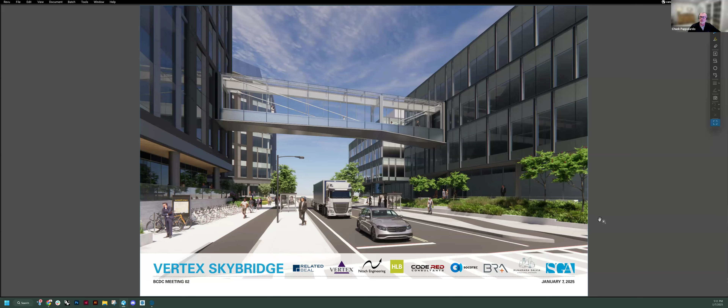A little bit about the basis, reasoning, and requirements for the bridge. The bridge itself is really necessary to facilitate ongoing manufacturing operations, as well as research activities at our East Seaport location, Leiden Center 1 and Leiden Center 2. Importantly, we are manufacturing our newest cell-based therapy program there. These are living cells that we manufacture in one building, and do QC testing in the second building. So the thoroughfare between the buildings is truly a requirement to facilitate this process in an efficient and timely manner, recognizing that this particular therapy has a 72-hour shelf life. So from the time it completes QC testing, we have to get it into the patient within 72 hours. That's really the basis around the impetus of the bridge between the buildings.

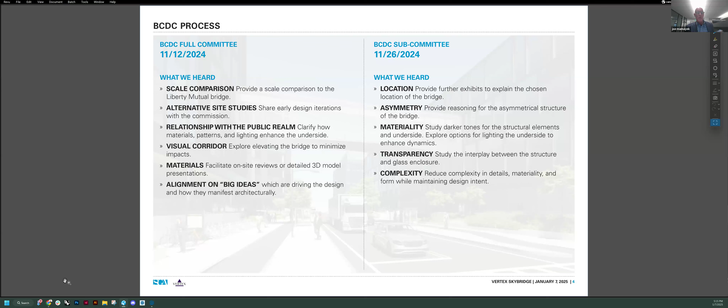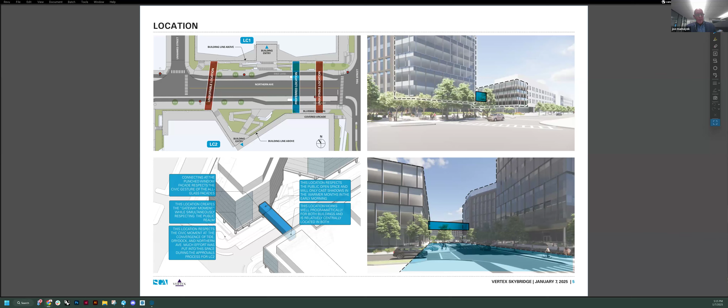In terms of materiality, we explored a number of materials, colors, hues, and textures for possibility with the application of the bridge. So we started with the light grays and silvers, looked at the darker grays and charcoals, and even moved into some of the bronze and copper patinas for consideration.

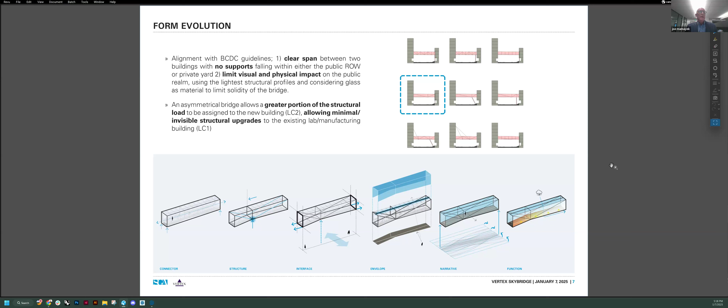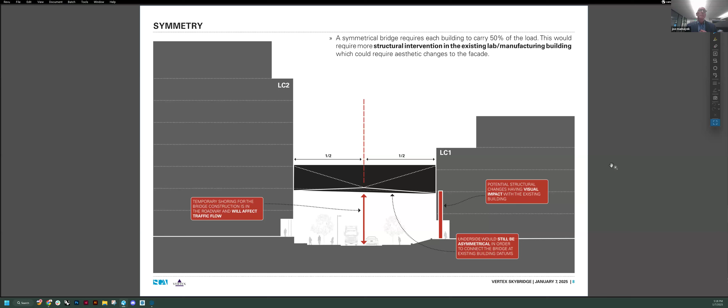Thank you. In terms of the symmetry of the bridge, we're looking at that point, 50% of the load would be applied to both buildings, and this would require some structural interventions of the existing lab manufacturing building, and certainly we wanted to minimize that impact.

Next one, please. In terms of going to the asymmetrical scheme, it allowed us to reflect the composition of the buildings themselves in the context that it is working in. So there's a balance to the overall composition with the asymmetrical scheme, and a greater portion of the structural load could be assigned to the new building, to LC2 on the left-hand side.

Last but not least, this asymmetrical bridge allowed for a reduced impact to the roadway during construction because it could be supported curbside.

An asymmetrical bridge design becomes more elegant, in my opinion, if the following things are taken into consideration. When the structural expression itself is not primary, it's secondary, or it's supporting the overall form. There's maximum transparency - the middle one is the most transparent. Our bridge itself has 3 sides of glass, so it's maximum transparency. And the last item, which is really critical, is that there's a balance to the overall composition to the buildings that they are attaching and the urban space that it's working in.

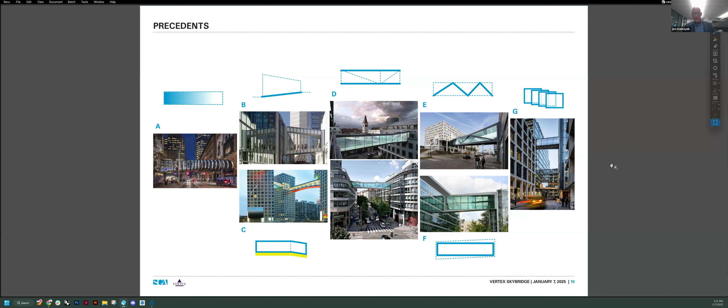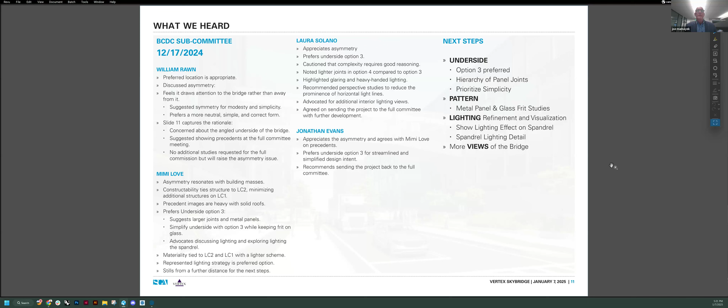Okay, so what we heard from the second subcommittee was to look at the underside, really simplify that, look at the patterning of the bridge, look at the lighting, and look at a few additional views of the bridge at different distances.

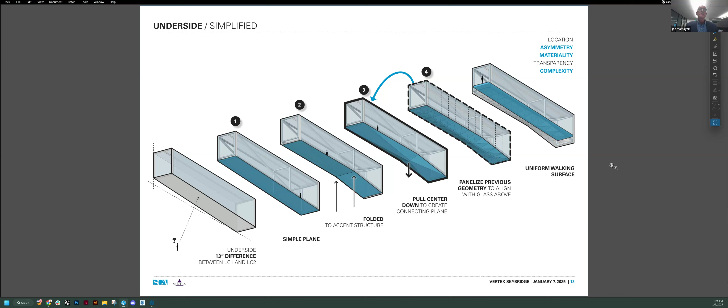This is an evolution of the bridge itself. We've essentially removed step 4 in this process and relaxed to step 3, which is a stronger statement, something we had in a previous scheme. Here's a diagram of that geometry and how it's really simplified. We're also looking at the hierarchy of panel joints—that was also part of the discussion.

When looking at the bridge, we're also considering its attachment and its reaction to the surfaces of the two buildings, looking at the horizontal and vertical datum points.

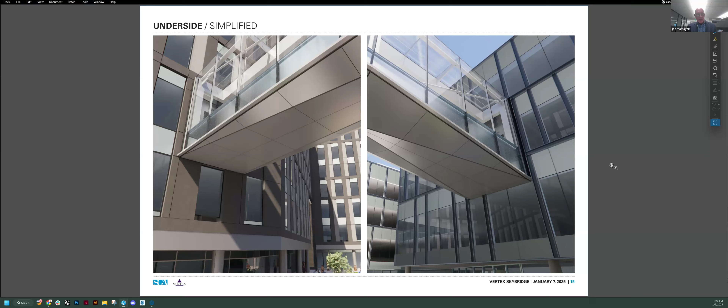Also from the patterning, working from the right to the left, the pattern is asymmetrical and densified. We've now removed the embossing on the underside of the bridge itself. We've relaxed the frit pattern to 1.5 to 2%, which helps the performance of the glazing but also makes it bird safe.

Looking at the lighting, this is something we're bringing forward with a little more clarity, looking at the light details and effects. Again, it's very sophisticated LED lighting. Here's an interior lighting scheme where there are no visible luminaires, either in the bridge itself or the public realm. You can see some of the technical lighting, positioned to give accents on the outside as well as the inside of the bridge.

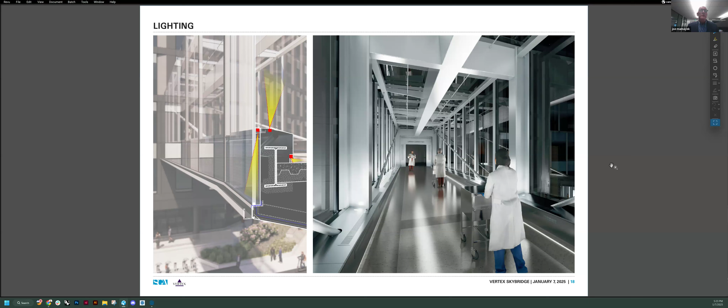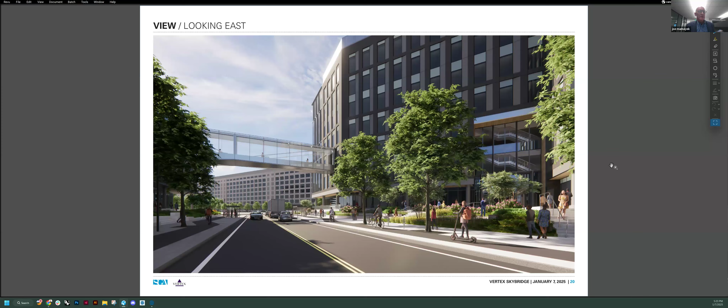Thank you. A few final views, coming a little closer to the bridge itself, a little closer to the site, looking at it from the public space right here, the main entry to the building. And lastly, the simple form-making, the selection of materials, the sophistication of the lighting scheme, and the balance of the overall composition will allow the bridge to become an elegant gateway within the Marine Industrial Park. So with that, I conclude my presentation, and thank you.

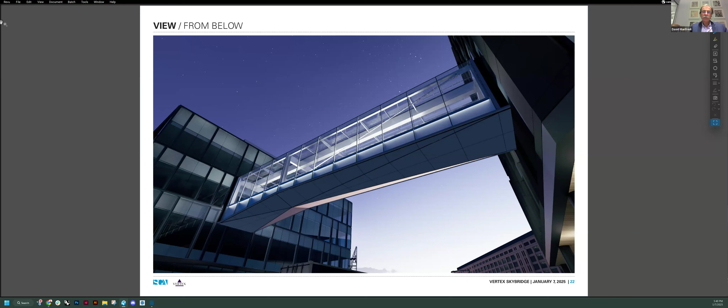And my second point is, I think Mimi made a great point. If there's one piece here, and I understand it structurally, that feels big, heavy, it is that big beam that runs between the two buildings. I'm sure there's not one bit of exaggeration in that section, but I agree with Mimi that I would ask you to really study how it's illuminated in order to diminish it and not celebrate it. The lightness of the envelope on the three sides is really very nice. I think lightness goes a long way to success in these bridges, and I wouldn't celebrate the heaviest piece of the composition.

Can you go to, let's take another viewpoint here, David. Thank you for your comments.

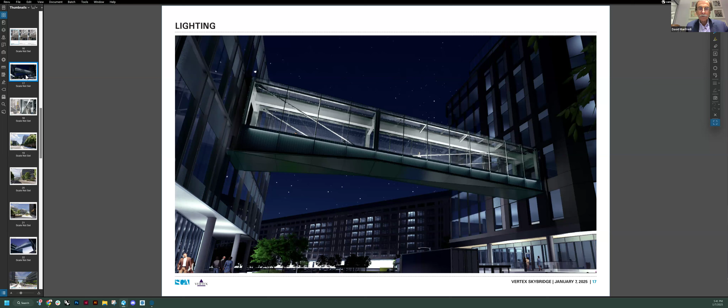I think what I'm hearing here is maybe de-emphasizing that center beam. That center beam obviously was there. We moved the structure from the corners, upper corners, to that center portion, which was a very good move, so we can celebrate the glass. But I think what we're hearing here, and I agree, is somehow reducing the amount of light onto that, and perhaps we get that desired effect. In the night sky, you almost want that beam to just disappear, and you see the very simple lines and the transparency. But overall, very elegant solution.

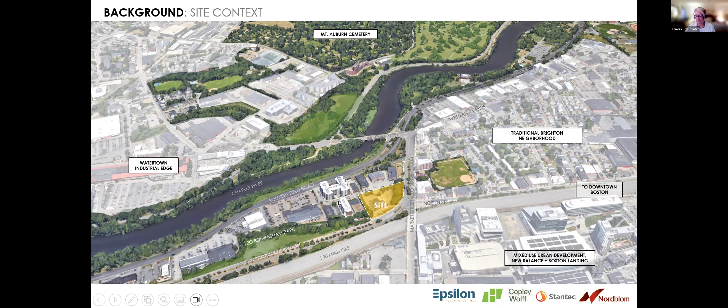Get this to advance, there we go. And as we've mentioned, it's just a fantastic threshold site at the corner of Market Street and Leo Birmingham, but it's also sort of in this ribbon of historic green space around the Charles River and in a new emerging neighborhood. It's very well connected, as this shows, both bikes and pedestrians and transit.

So our concept is into the woods, and we took a site with around a 24-foot average drop from one side to the other to take the opportunity to conceal our parking, develop a building in 3 wings where the open part of it faces directly south to take advantage of that for our amenity courtyard. We then are landscaping the front of it because the road is going on a diet, and we've clad it in warm wood and charcoal gray. And this is our final rendering.

What we heard both times from you all was really compliments on the architecture and landscape of the project, but specifically these points, which we then are bringing back to you today with some more revisions. One is bringing the green character to the boundary of the amenity courtyard. It was a simple fence, and it's been improved thanks to a lot of Laura's comments about trying to integrate that to the slope and the hills of the greenery at this corner. Adding more green space to the center of the cul-de-sac down on Soldiers Field Place, and making sure to refine the connection that we're looking at from the top to the bottom of the site. And then for architecture, improving what's seen from Soldiers Field Road. There's a pedestrian passage there we'll look at, and trying to celebrate both entrances a bit more.

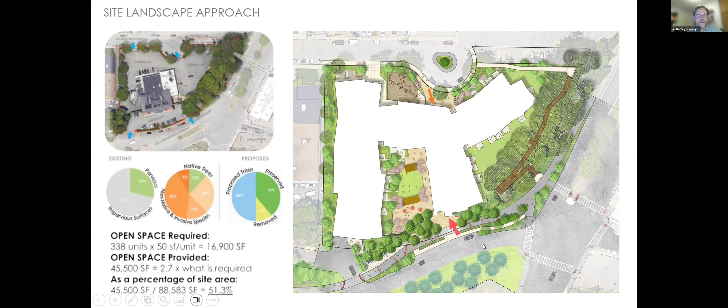This blows up the side of the project facing Boston Landing. The small blow-up on the left is what we had before, and the larger plan is where we are today. We increased the buffer from that southern-facing courtyard space with more landscape area, a sloped berm landform, and more vegetation, again trying to take the character of the existing grove to the left of the site and extend it across, so the building feels enshrouded in that greenery.

The small sections on the lower left show the before and after. The top one shows what we had before: just a fence, a hedge, and some lower level plantings. The section underneath shows the berming — we've introduced a wall to get more soil depth, really increasing the depth and height of the vegetation to make that a stronger edge.

Another thing shown here, which didn't come up in the BCDC but came through conversations with IAG and staff, is that the drop-off along Leo Birmingham Parkway has been extended from about 3 cars to about 5. We now have a stronger vegetated separation from the sidewalk at the drop-off from that multi-use path, to really limit the amount of crossings there — it's a safer condition.

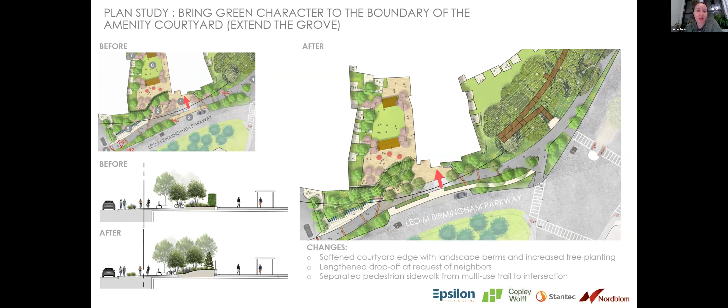Okay, great, thanks — we're also on the halfway slide.

This blows up the lower level Soldiers Field Place turnaround. One comment we heard was to do something with that expansive pavement in the turnaround, so we've introduced an island, a teardrop shape, planted in the middle, with cobble aprons around it to accommodate larger vehicles.

We've also diversified the experience of the dog area for residents, bisecting it into a smaller dog and bigger dog area, and introduced some topography there to make it more interesting. We've also started to look at the pedestrian connectivity from this cul-de-sac to the upper elevation, which will come up in the next slide.

This slide shows all the different configurations we tried for pedestrian connectivity from the lower elevation of Soldiers Field Place up to Leo Birmingham Parkway — about a 24-foot grade change, with all sorts of accessibility and access constraints to deal with. Through our process, we've heard that option 3, going right through the woods and that grove, is the preferred direction, and that's what we've expanded to show you.

This shows how we're planning to make that pedestrian connection from Soldiers Field Place up to Leo Birmingham Parkway. We're starting at about elevation 18 with a gently sloped pathway. Towards the bottom of that slope, we have a structured ramp on grade, giving us a landing point for an elevated boardwalk structure that flies through the slope, trying to miss as many trees as possible, and brings us up to an outlet closer to the intersection with Birmingham Parkway and Market Street.

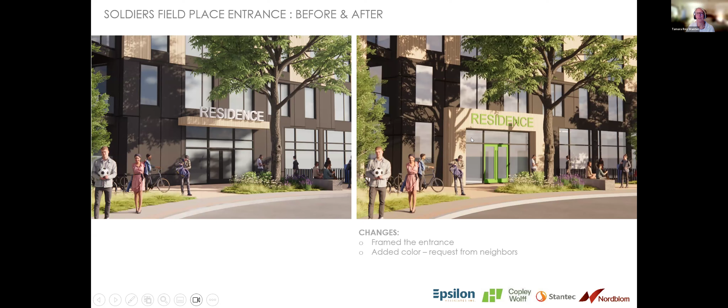This is our final slide, also at the front entrance. We've worked quite a bit on this in terms of improving the presence of the entry. We've extended out these pillars, extended out the canopy, created a little niche where people can wait for their Uber or other TNC, and added some color at the doorway.

As Ian mentioned, all of the landscape improvements around this central community plaza, we hope, will create a great gathering area along the multi-use trail for folks to have water filling and bike repair, and the blue bikes here as well. A great place to meet your neighbor and create a benefit for the whole neighborhood along this path. So that's it, thank you very much.

Thanks, Tamara. Thanks, Ian. Seth, before I turn it over to you, I'm anticipating a question from the commissioners: do you have a lighting diagram for the pathway that goes up?

We do not at this time, but we've been speaking with the boardwalk folks about how to integrate that into the boardwalk. We know that's going to be really important to have that safe, open, and well lit. I figured if you did, I would have you flash it up quickly for the commissioners.

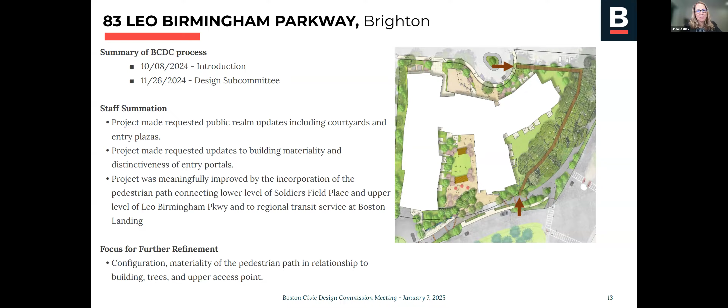Thanks, Seth. All right, Commissioners Evans, Love, Ron, and Solano, you have been at recent subcommittees, so we will let you take the first opportunity for comment.

Maybe the proponent can bring up their show, maybe one of the diagrams that shows us the open space and building in context.

You predicted our question, I see. Okay, thank you. All right, Mimi, I see your hand.

Yeah, I'm happy to start. I think this project has been a very strong project from the beginning since we saw it, and it's only gotten more refined and improved with the addition of that path. I think you were spot on, Linda, on asking about the lighting, because that's the one thing I was thinking about, as it's an incredibly useful path, not only for the residents of this building but for the neighborhood. But it needs to be safe, and lighting will be an important component.

So, I'm fully supportive, and I imagine that'll continue to develop as this talking to the boardwalk manufacturer, whoever you're talking to. I think that's an important piece.

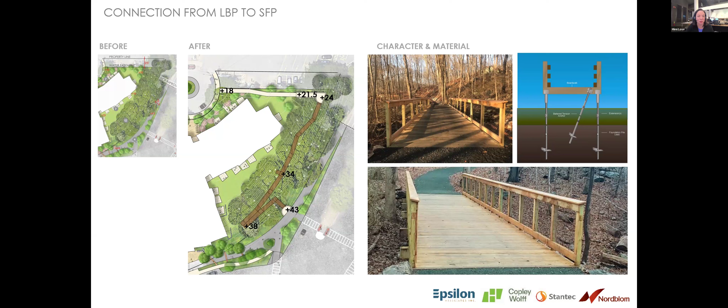I will say I still feel like the entrances aren't quite right. I can't even really recognize the changes from the last time we met, but I think that's an issue for the planning department to continue working on the entrances, and maybe they've now become too different from each other. But I do recognize that the entrance off of Leo Birmingham Parkway is the more important entry, and I like the scale and the moves and materiality. I'm still not exactly sure, but those are fairly minor comments.

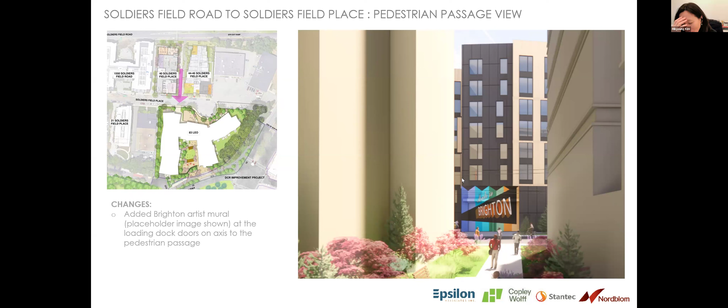I'm not going to repeat what everyone else says. Ditto. I wanted to just, I haven't actually seen this project before, so I think I just wanted to go back to Boston Planning and probably to this team.

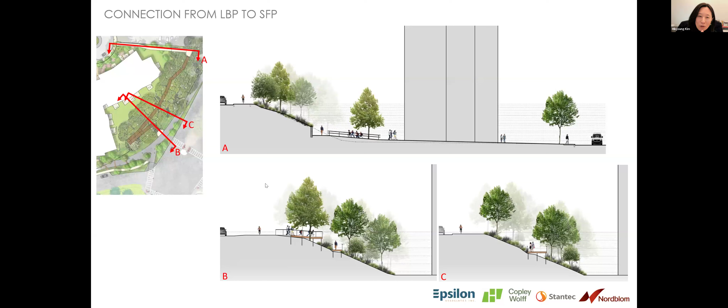There's a lot of interesting housing projects being developed, and just as a reminder to everybody, this is not this bucolic kind of neighborhood, but it is framed by the Mass Turnpike, by Soldiers Field Road, and Leo Birmingham Parkway, which is double laned and very busy. It is not pedestrian in any way. And this is the first project that I can remember that now jumps the road across Leo Birmingham. We've seen a bunch of residential projects on the other side of Leo Birmingham, and a lot of them are housing projects.

So I just leave this challenge with both the design team, because I think you've done an excellent job connecting things internally. But I think it would be good, as we look at future projects in this whole neighborhood, to ask the question: what makes a neighborhood? Now that we're making so much housing here and there are a lot of people living here, plus these big box retail stores, how can we make sure... all these projects are making very lovely, more internal green spaces and open spaces that are often more private. And then there's a playground across the street, if I'm remembering correctly, but crossing the street is a little perilous.

So I would just ask, as Seth and other folks go back and look at this project, to make sure that... I saw a planning document where there were these blocks of buildings, but it occurred to me as I saw this project that this is the one place in Boston where development teams have had the luxury to create really expansive open spaces, and to understand what the open space plan of this is. Because when I see each of these individual streetscapes, I think, oh, that's lovely. But then if I imagine it in its context, I have a harder time understanding how we're building a neighborhood here.

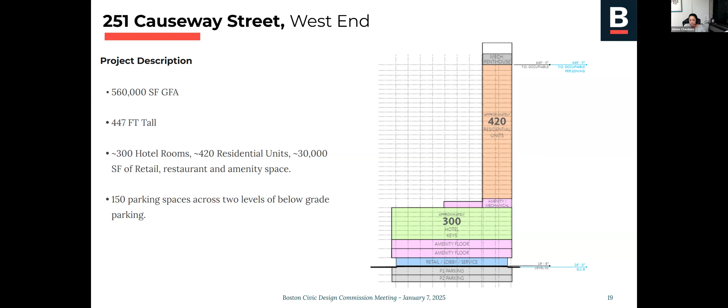The site is located in the Bulfinch Triangle plan, which was adopted in 1990. It was developed to restore the architectural integrity, traditional scale, and unique urban character of this neighborhood. New developments are encouraged through this plan to be contextual to the historic fabric of the neighborhood while enhancing its connectivity to surrounding areas.

Guidelines are given for design and dimensional requirements and are outlined in the plan itself. It's important to keep the goals of the plan in mind, noting that there have not been other development plans or zoning in the area since this time. Therefore, we understand its dated nature and the large amount of change that has occurred with respect to the surrounding context. We think a delicate balance must be made in taking both of those things into account.

It's also important to note that the site is located in the Coastal Flood Resilience Overlay District, or CFROD, which is designated for areas susceptible to high sea level rise. Due to this flooding danger, there are specific guidelines given by CFROD to ensure resilience in anything built. CFROD is a crucial overlay that this project must follow to provide the needed safety.

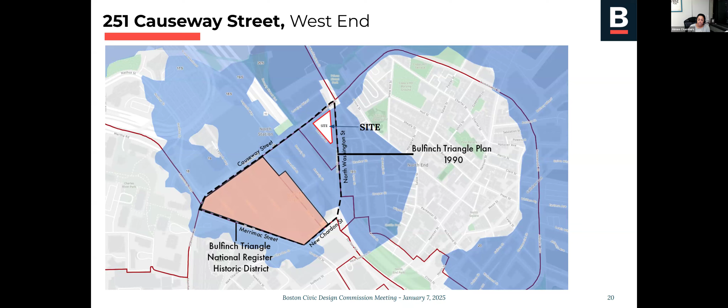A flash history: the district was conceived by Charles Bulfinch in 1808 and was a nexus of rail infrastructure, industrial, and commercial uses in its early years. Today, the historic district is made up of late 19th and early 20th century commercial structures that were once the center of the region's furniture trade. Over its history, the district has experienced constant evolution as a regional transportation hub with commercial uses and, more recently, entertainment, residential, and hospitality uses.

The Bulfinch Triangle today is bounded by Causeway Street, North Washington Street, New Chardon Street, and Merrimac Street. The site is located in the northeast corner of the district at the intersection of North Washington and Causeway, and flanks Medford Street. The triangle is surrounded by the North End to the right, the West End to the left, the edge of Government Center, and the North Station Boston Garden Hub on Causeway complex. The old elevated central artery and Green Line used to bisect the neighborhood just east of Canal Street.

The formalized Bulfinch Triangle Historic District lies to the west of this area at a predominant height of approximately 80 feet. The Central Artery Tunnel project put these large infrastructural elements below grade and replaced them with a new fabric of between 110 and 160 feet in height, between 2007 and 2018. The surrounding areas across Causeway Street then saw significant redevelopment in the following years.

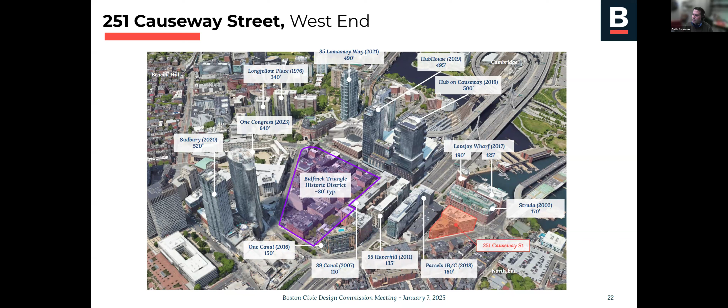With the TD Garden, Lovejoy Wharf, and the Hub on Causeway, and more recently, the Government Center garage is being transformed into a multi-block mixed-use complex. The fabric of the North End across Washington Street remains relatively unchanged, with smaller scale reinvestment over the last few decades.

Article 46 of the zoning regulations sets the max height at 100 feet and max FAR at 7, provided that the project is subject to large project review. It should be noted that the zoning requires a step back from Causeway Street: starting at a height of 65 feet, the building must step back at least 25 feet. The proposed project is located in the CFROD with a sea level rise base flood height of 19.5 feet, which will have implications for the uses under that base floodplain and the design strategies for flood safety.

While there are no parking requirements for the Bulfinch Triangle District, this project will be subject to Boston Transportation Department's large project parking maximum of 285 spaces. The North Station Mobility Action Plan has planned numerous improvements to bus, pedestrian, and cycling circulation in the area, and particular attention should be paid to the design of the pickup and drop-off areas, as well as parking and service entrances.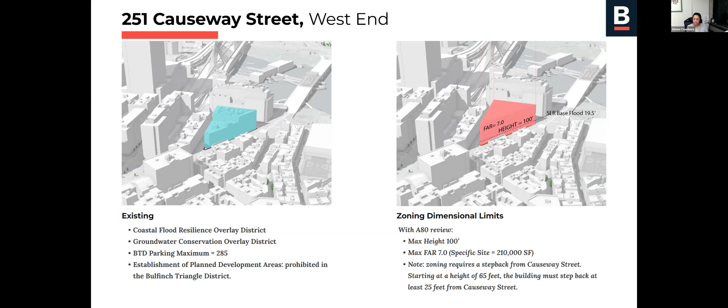Section 46-8.1 is taken directly from the zoning code. These provisions are derived from the 1990 Bulfinch Triangle District Plan. These are some of the specific guidelines and highlights given for new developments to the neighborhood. So commissioners, as you take in the project itself, we would encourage bearing in mind the design considerations here on the screen. And that concludes my presentation.

Commissioners, I think having the proponents come earlier has been a request of our commission, so we're excited to get some initial feedback from this commission early on.

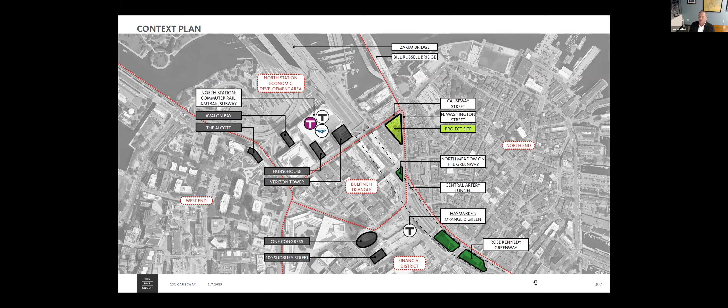With that, I'll kick it over to David to go through the design. Hi, I'm David Epstein, design principal at Gensler.

I'm going to take you through conceptual massing, looking at how the program could fit in the city, which is the major thing we've been thinking about. This is the stacking diagram you saw a minute ago, a mid-rise 150-foot high building that would hold the 300-room hotel, with the 420-unit apartment building placed on top and pushed to the north of the site, keeping it quite slender.

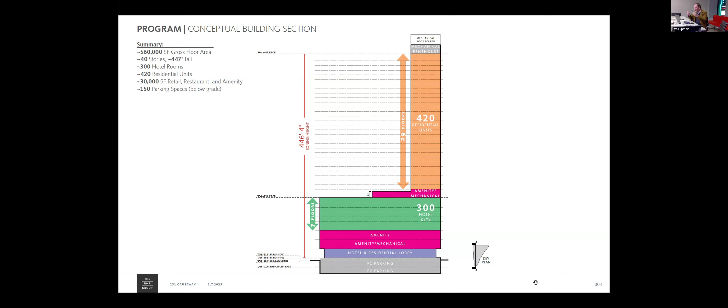To show you conceptually what our design logic is: the hotel, at 150-foot height, is at the same orientation as the rest of the triangle, trying to push that as a nice, beautifully scaled building. Then we place the tower, pushing it to the north, away from the triangle and the North End, keeping the east and west sides slender to reduce the amount of shadows cast on the North End.

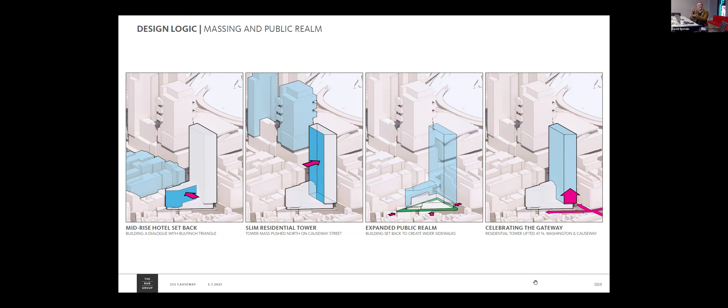The next important thing about this project is changing the public realm that's there today, lifting the building up and pushing the massing inward to make the sidewalks much larger than they are today. There's also the resilience aspect just spoken about, lifting the building up to create a bit of a porch around the building, pulling it out of the ground plane, and celebrating this gateway site by lifting the entire residential tower above the corner of North Washington and Causeway.

This sets up what that frame is like, pushing our building, in the bottom right-hand corner, to the edge of the gateway, sitting on Causeway, with the mass holding the smaller scale hotel building at the same orientation as the buildings of the triangle, creating a flatiron building out of that.

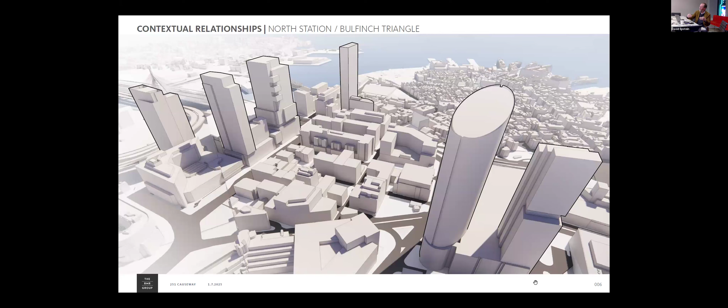When you look at this photo from above, from the west end, looking towards the building, placing it almost at the edge corner of the site as you arrive on the Bill Russell Bridge to the city, and having it be one of the taller buildings on the Causeway, as part of that dialogue of those towers. The most important piece is very much about the ground plane and how it's going to change what's there today so significantly.

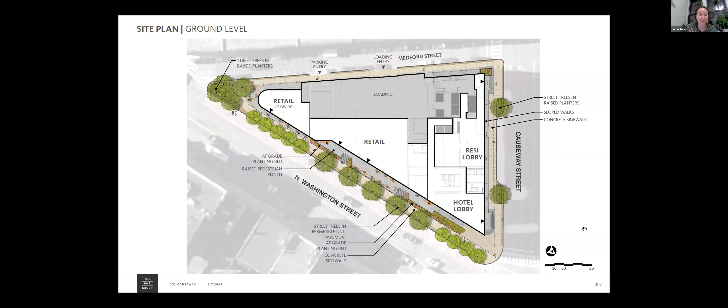Now, a little bit about the preliminary massing, taking this diagram and applying the skin just for scale more than anything. We know we're going to build a resilient, sustainable passive house project. But this shows, most importantly, a slender tower pushed to the north side, a smaller flat iron building to the south side, connecting with the scale of the Bulfinch Triangle, the tower now being part of the towers on Causeway.

As you approach on North Washington and Causeway, lifting the tower up creates this higher open space, lifting it to the sky and creating the gateway, getting what Kaki just spoke about, this kind of lifted ground plane with trees on the street side, a terrace on the third floor that's part of the amenities, and a roof terrace on 11. So you get this greening of the street, a triangle space created of a deck space and a roof space.

And then as you see it from North Washington, moving northway on the road, this flat iron building lifted off the ground plane creates a larger sidewalk by pushing the building in, and then this small pocket park at the nose of the site creates a kind of buffer zone and a bit of a safety zone, because the street's quite busy with buses and cars on North Washington, trying to make that a much nicer experience than it is today.

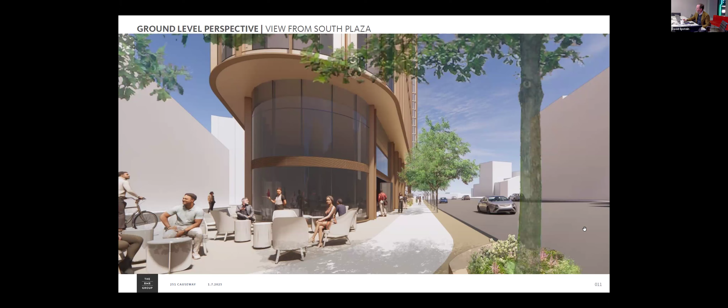And then looking lastly at the massing from above, the hotel building at that 150-foot height creates this flat iron building on the corner, and then the tower pushed to the north, framing that zone and creating these outdoor terraces, and a simple building in the skyline that creates this frame around this entire section of the city.

And with that, what we want to do more than anything is show you guys how to take a program, sit it on the site, fit it into the city at a conceptual level, at a massing level, and really just get input early on in the project.

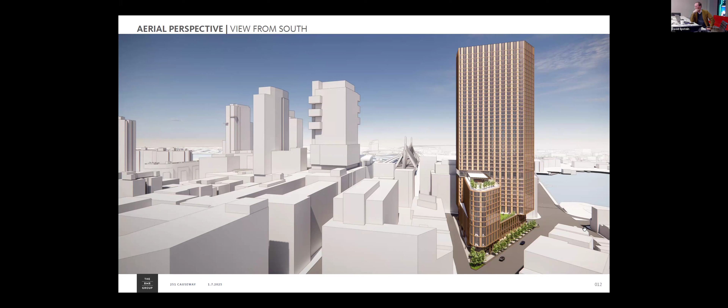Thank you, David and Kaki. Commissioners, raise your hand, but I'm going to start with Kirk Sykes. Actually, Mimi, if you don't mind, we have some urban design progress to share. Lizzie, if you could share. Yeah, I thought that was woven in before.

Apologies. So prior to the presentation we give context, and post-presentation we start to talk through the conversations and issues we've been having with the proponent and the particular challenges the site produces. This site is really emblematic of the challenge in a dense urban environment of the relationship between and competition between public realm, transportation, historic preservation, and good urban development and design.

The existing fabric, as you can see on the right, is marked by a very limited public realm with very challenging slopes, and also speaks to the contested space of streets and sidewalks, which often limit new opportunities for open space. As we work on this project we're asking how much of the existing urban fabric should be saved, and what are the opportunities for new public realm in all preservation scenarios.

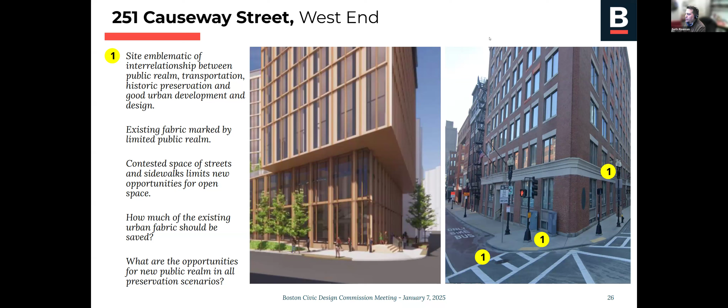Next slide, please. The proposed project creates additional public realm at the sidewalk level by undercutting the upper levels. And because of the need to change the grade for CFROD, there is a lot of tricky navigation of grades to get from the lower level to the upper level that Kaki took us through.

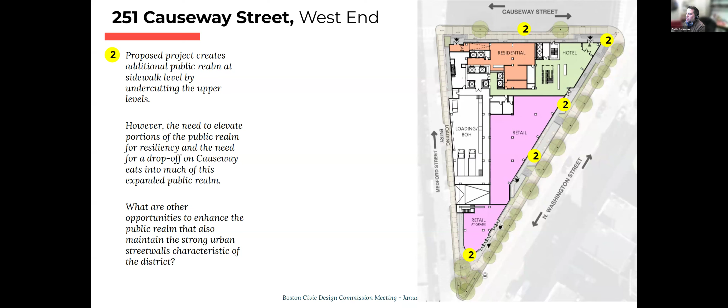Additionally, there's a drop-off proposed on Causeway Street that begins to eat into some of this expanded public realm. We are asking very much what are the other opportunities to enhance the public realm that also maintain the strong urban street wall characteristic of the district. Next slide, please.

As the proponent mentioned, they are early on in the design process and will be conducting a series of additional studies as part of their DPIR filing. We very much think these studies are needed to evaluate the relationship of the building to the context and the impact on the public realm, including urban form, historic resources, environmental factors such as wind and shadow, and of course open space.

Specific studies we'll be requesting include the tower orientation, the tower and podium orientation, where setbacks may make sense, step backs as well, and providing a clear logic for the tower massing and height within its immediate context and context stretching across the adjoining neighborhoods.

We're requesting them to look at alternative schemes that maintain the corner 251 Causeway Street building and/or other buildings on the site to see the pros and cons. We're looking for additional views that back up from various vantage points within Bulfinch Triangle and across North Washington Street from the North End. And of course, as part of any DPIR, but really important here, we'll want to understand wind and thermal comfort analyses. With that, I'll turn it back to the commissioners.

Thank you. Thanks, Seth. I see a lot of hands raised, which is great. Looking forward to the comments. If we could just keep them tight and not repeat, that would be helpful in trying to keep our time, which I'm already not hopeful that we're going to stick to on our agenda. But with that, Kirk Sykes.

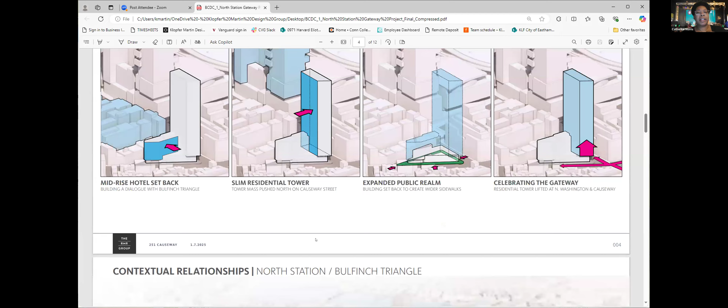The ground plane is probably more of a major concern for me because Medford Street on a busy day, if there's a Celtics game, something at the city winery, something else happening, people zoom through that street. And it's a heavy concern about the traffic on that side and it being a loading dock and people also trying to figure out ways of parking. So I'm concerned about that side of Medford Street as people are using it as a pass through to get to Causeway.

And then from Causeway, when you're turning onto Washington Street, I'm not sure what that's going to do for transportation in terms of how buses zoom there, and the safety of pedestrians, particularly on that corner, because it is a very short sidewalk. It does raise concern for me around the safety and experience of people at that ground plane, given the current design being proposed tonight, that I just want you all to consider.

And that corner of Medford and Washington, which is essentially round, where the hotel lobby is at Causeway and Washington, you may want to consider rounding those edges, just because it's so stark from something that's much more welcoming on the other side versus where the hotel lobby is. Just something to consider when you're thinking about people's experiences engaging with this building and design.

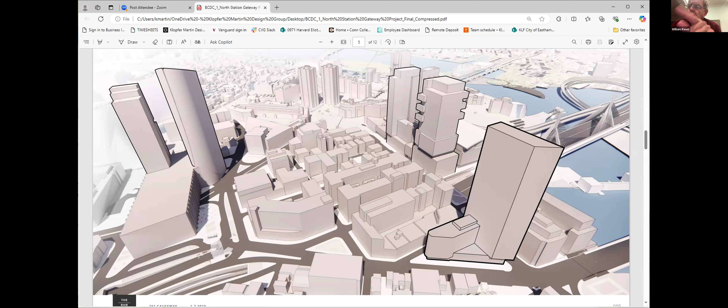Are you able to give us the view of this building in a developed rendering? It's been part of your presentation—yeah, this one. Okay, so when I first saw this view, I said this is quite extraordinary, the way this tower comes down to the ground and joins with a low-lying building, and then the hotel at the head of the site. Of course, what I didn't realize was that this tower overlaps the sidewalk in a serious way.

And so all of a sudden, a building which felt crisp and very clean in its connection to its lower piece suddenly overlaps both Causeway and Washington Street in such a strong way that you lose what could be an incredibly beautiful composition. So if I were in the petitioner's shoes, I'd be trying to get to that, to make the whole composition a much crisper thing.

A second point: recognizing the low-rise portion, the retail—listening to Khaki talk, it's clear that Khaki wishes there were a little more green on the site, I suspect, and certainly the public would too. And it's easier to take away the two stories of the low-rise piece than other pieces of this building. So I ask that be considered.

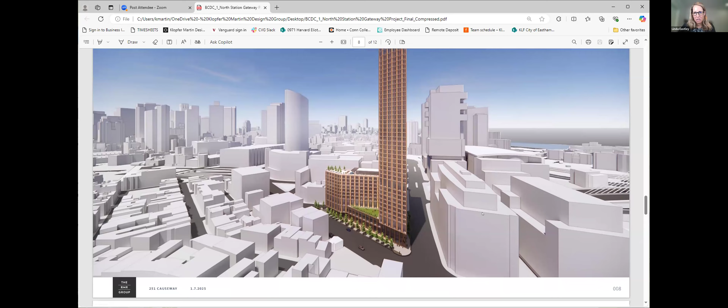So we see it here at this really important corner. Again, the idea that the public realm is expressed as a product of this underbelly of the tower - it just feels like it could be a little bit more, and it feels like that building is larger than the site maybe should be allowing. If we move to slide 11, it shows another example of how we're essentially undercutting in order to get that public realm. Could there be opportunities where that building hits the ground in a different way while still creating a generous public realm expression?

The other piece that hasn't really been talked about today - and this is early days, of course - if we can go to slide 12, and scroll up just a little bit, I wanted to talk about the top. As you're exploring this with us and with the planning department, I'd really love to understand your thoughts about the top. For me right now, because you haven't had a chance to look at that design, I think the top becomes so important. Part of the reason is that you're going to be seeing it from a really long view, coming across the bridge in two directions. I think to make that landmark statement, there needs to be something really special that happens there.

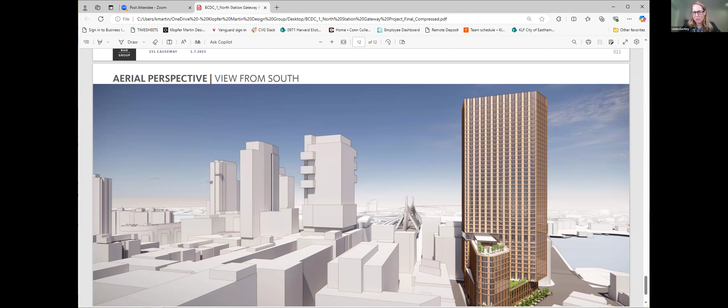And last, I wanted to talk a little bit about the pocket park - we don't need a slide to talk about it. I think this is a really terrific idea. It is an incredibly busy corner. As you, Kaki and others begin to explore that, I'd be curious to understand how you might integrate some sound mitigation tools into that site to really make it a respite and a haven on that corner. I think in its own right it becomes a gateway at a different scale when you're coming from the other direction toward the Bulfinch Triangle. I think actually having that low presence with the hotel and this kind of green presence could be as wonderful as having a really strong architectural edge on the other side of the site.

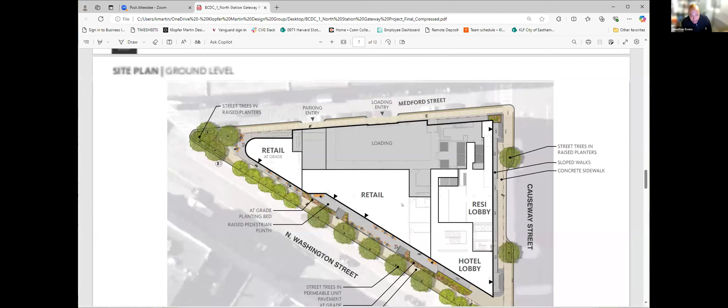Thank you. Again, it's really helpful to see this early and elevate some red flags, which I think we're seeing. I agree with a lot of what's been said, specifically with what Bill and Linda have offered. Can you go to the slide that showed the massing generation diagrams? I think these are helpful. As we go into future subcommittee meetings, similar to what Kathy just said, I think understanding what else has been considered to get to this. What are some of the rules for why the tower is oriented that way, and sort of not perhaps in a north-south direction?

Just basically understanding what the bigger organizing idea is. I kind of get some of the impetus to fit in with the fabric, with the mid-rise and then stepping up. But again, I'd love to understand a little bit more, see some more about what else has been considered in how to put these pieces together, just to better understand, maybe to David's points, fit and contextuality and appropriateness, but also a clearer understanding from your end about what your design goal is, or what the objective is, what you're trying to accomplish here, beyond just the idea of a gateway, which can mean a lot of different things. So I'll leave it there without repeating what else has been said, but it's exciting to see this and I look forward to more conversations in subcommittee.

Thanks, Jonathan. David Manfredi.

Yeah, very briefly, there's an awful lot to think about and talk about here. First of all, I do really appreciate your coming in early and showing your, I guess not first, but early thoughts. And obviously you have put a good deal of thought into this. It's a gateway, I guess, to the city. It's also in the middle in so many ways. It's wrapped on one side, on almost half of the circumference, by Lovejoy Wharf and the North End and Bulfinch, and relevant to all the things that David talked about.

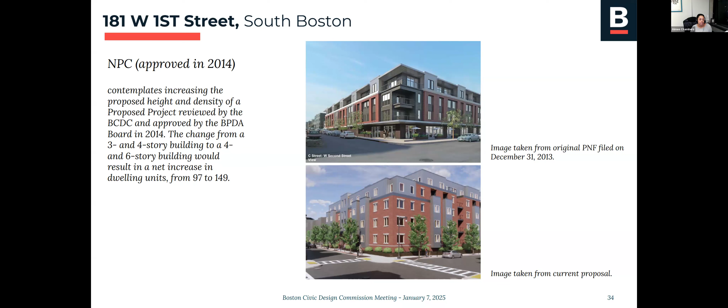The proposed multifamily residential use is permitted within the MFR, the multifamily residential zoning subdistrict. The 2011 Planning and Rezoning Initiative for West 1st Street, codified in Article 68, envisioned a residential context to the west of the corridor and a more industrial fabric to the east, closer to the waterfront. When the zoning was adopted, it was presumed that properties along the Reserved Channel would continue to be characterized by industrial and surface parking uses in the long term.

Subsequent years have seen an evolution of these uses in the neighborhood, including the addition of residential uses in the immediate adjacent area. The South Boston Transportation Action Plan, an ongoing project hopefully soon to be wrapped up, will evaluate safety concerns in South Boston and focus the city's resources on proven strategies and people-first improvements to eliminate serious and fatal traffic crashes.

The goal of SBTAP, as it is called, is to build upon the vision and goals set forth in Imagine Boston 2030 and highlighted further in Go Boston 2030. Through improvements to the surrounding streetscape and abutting sidewalks, this project will help to reinforce the goals outlined by said plan.

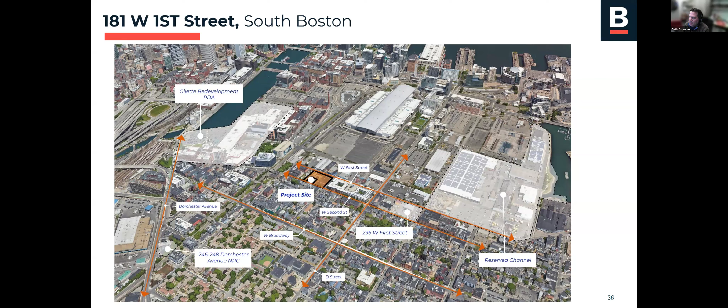While the proposed project exceeds zoning dimensional maximums, planning and urban design staff worked to refine building massing that is contextually consistent with the ongoing evolution of West 2nd and West 1st Streets. These changes include a 6-story setback that came out of discussion with the community, which helps bring the project closer to the scale already present in the area. Staff review also focused on improvements to the surrounding public realm, including new widened sidewalks, upgraded street intersections for enhanced pedestrian safety, and the protection and addition of street trees to create a robust canopy around the site perimeter.

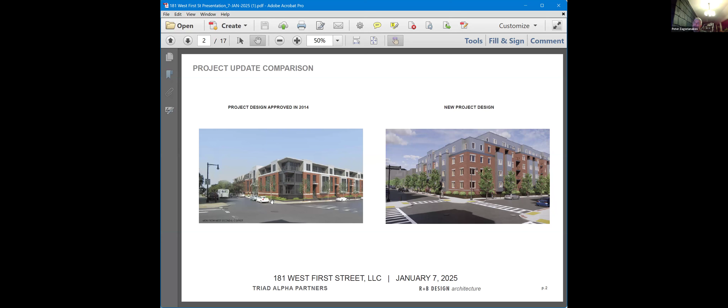In order to implement affordable units and more infrastructure improvements, we've decided to come back for a taller project. We were 3 stories on 2nd Street; we are now 4 stories on 2nd Street, and we are 6 stories on 1st Street, where we were 4 stories on 1st Street. We have increased the FAR from 2.0 to 3.1. The unit count increased from 97 to 148. The affordable units went up from none to 20 units.

This project is passive house certifiable. We're doing a project of 127 units at the corner of 8th Street and 1st and 2nd, down 5 blocks down the street, which is passive house certified right now.

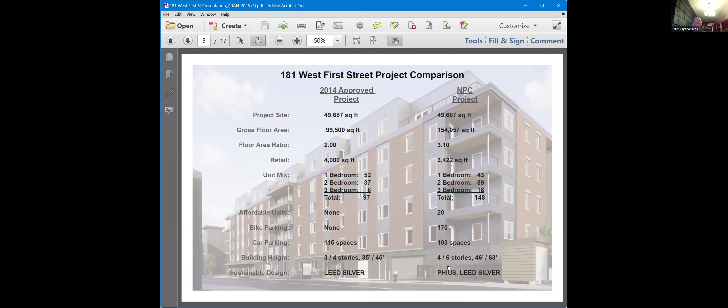As the BPDA mentioned, this is a transition zone. Across from us on 2nd Street are mostly 3- and 4-story residential buildings. Then you have the West Square building, a 4.5-story building built approximately 10 years ago, which takes up the entire block. The Signal building is on the same side of the street as we are; I own that building and did that about 15 years ago. And then we have two commercial projects permitted right along C Street behind us as you approach the convention center—one's a biotech building and one's a hotel. Both of those buildings are proposed to be 75 feet.

We also have Mahoney Park, which is a very important element of the neighborhood right next to us. We've considered the different elements and stakeholders in the area, meeting with the neighbors multiple times and the BPDA multiple times, and this is what the project has evolved into. We think we've got a very nice project here.

The first change we made is that the single corridor element of the building was set back 59 feet from 2nd Street. Originally that was right up to the street. We did that to create a pocket park, which helps us create more air and window lines to the three-story structure in the middle of our U-shaped site, and allows us to integrate with the park.

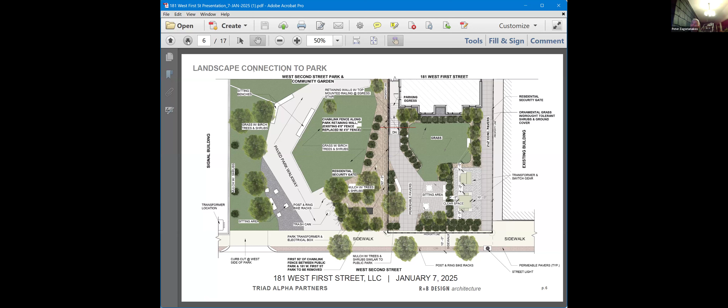A couple of pictures of the park itself. This is the fence that's being removed. This happens to be where the transformers in the park are, but all of this grading will actually grade nicely between the two properties.

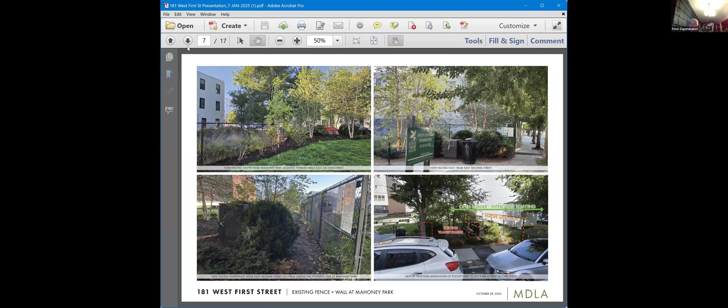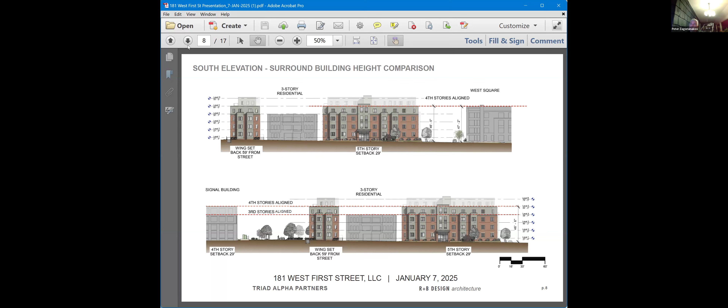Along C Street, we have the cornice line across from us, which is a 4-story residential building. We're slightly higher on our 4 stories, then transitioning up. Our 5th story is set back 29 feet to limit visibility from 2nd Street, transitioning up to a proposed building on Commercial Street, which is 75 feet. We're at approximately 63.5 feet high.

Along the park side, on our 5th or 6th story, depending on which elevation you're looking at, we've set this back 10 feet to eliminate that story from shading the plants in the park. And if this is our First Street elevation, I am going to turn it over to my architect, Ron Bennett, at this time.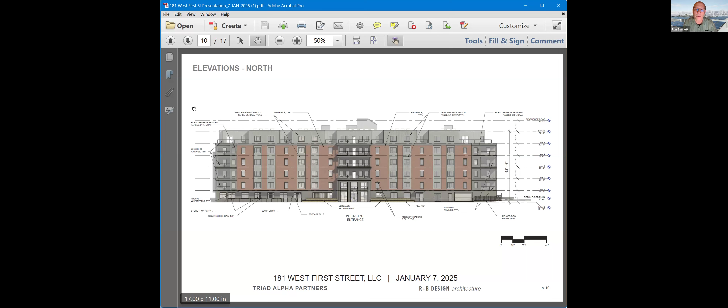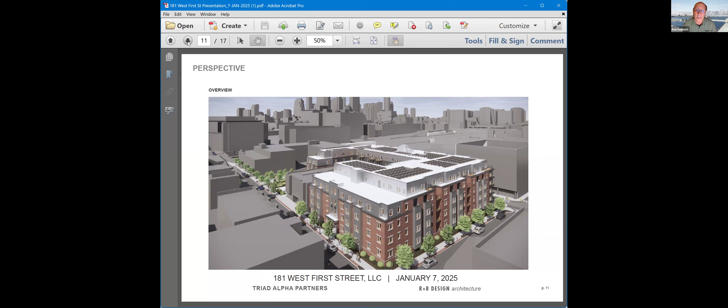We are presenting a simpler facade on West 2nd Street compared to what was approved in 2014. We eliminated the corner balconies, and in fact all balconies facing West 2nd Street, in response to our neighbors' concerns about balconies and roof decks facing that direction. This new design has fewer overhangs with a simpler penthouse level for a lighter profile against the sky. Because we'll pursue passive house certification, we've reduced the glass ratio to about 13% of the facade area with European style tilt-turn windows.

Fairly traditional materials palette specified for long-term durability and minimal maintenance: red brick, metal panels in two shades of gray, and touches of cement panels here and there surrounding the balconies.

We've articulated the facade with pairs of vertical bays around all sides of the building, and balconies in the corners, and roof setbacks on all sides except West 2nd Street.

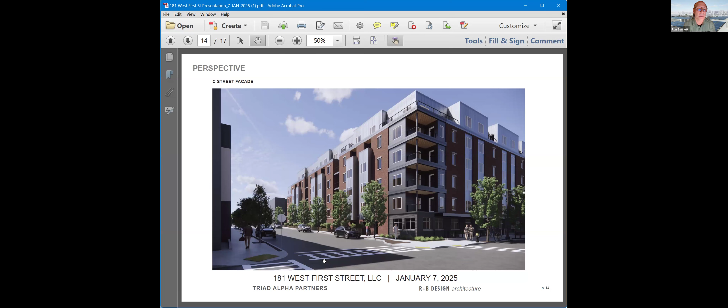You'll see them here. This is the corner balconies facing the corner of C and First. We also have balconies above our bays on C Street, and also on the roof setbacks in front of the penthouse.

On the west side of the building, we pushed the building back 59 feet from the street to create a park. We've also set back the penthouse level to reduce shading on the park next door. There are trees already growing in the park that will provide a nice screen between the park and the lower portions of our building.

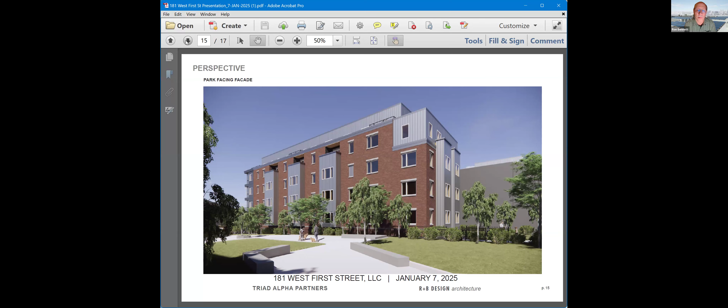I think we're done. Thank you, everybody.

Seth, are we going to get follow-up comments? Yes, Lizzie, you could share the screen.

We've been working with the proponent and focusing very much on the public realm, and are very much in support of the creation of publicly accessible on-site open space. With the increased height and density over the original scheme, we'd like to see if there's a possibility of creating even more open space.

The design and programming relationship of the new open space to the existing open space should be enhanced. The proponent talked about some of the challenges inherent in that, including grades, planting, and transformers, but we want to continue to explore enhancing that relationship with them. We also need to better understand the relationship between the tenant amenity space in the courtyard and the adjacent parcel.

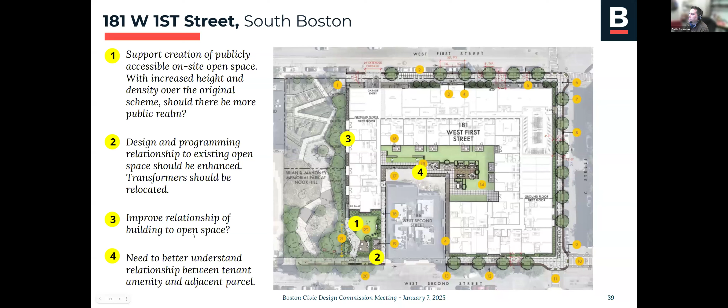We very much appreciate the intent to break down the scale of the building both horizontally and vertically, as well as aligning step backs and key datums to the height of existing context, particularly the setback on the upper level facing West 1st Street.

However, we think we need greater clarity on the massing logic of the overall composition, with a clear hierarchy of primary, secondary, and tertiary massing elements, and aligning articulation strategies with the massing strategies. Also focus very much on how the building meets the ground on each of the different frontages and unique sidewalks. With that, we'll turn it to the commissioners.

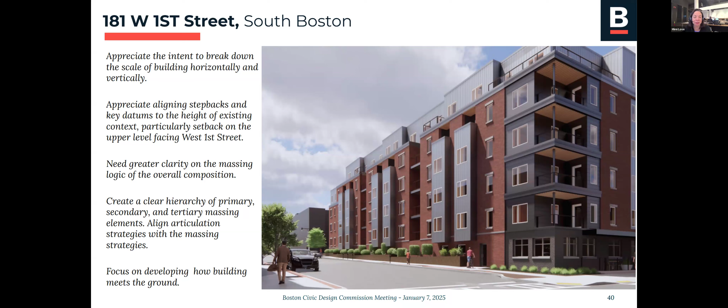Thank you, Seth. Commissioners, comments? Maybe we can have the proponent team pull up the presentation. Maybe we start with the site plan, and then we'll pass it on to David Hassin.

Okay, I'm happy to kick it off. I think the proponents are correct, and planning is correct, in identifying this area as a transitional area that could take more height and massing than the previous proposal did.

In that respect, I think the larger program, the introduction of affordable housing and so forth, is all very positive. The pulling back of the massing of the single-loaded U to create more space does provide a more gracious entrance to Mahoney Park, and some of the things that Peter mentioned make a lot of sense as well.

I do think it helps certainly with the snuggle that the building basically creates around the existing three-story residential.

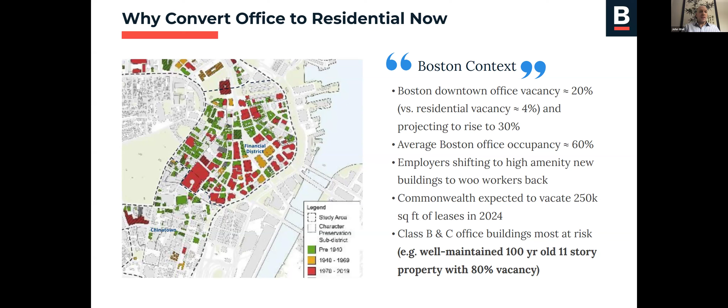Mayor Wu's office residential conversion program, from our perspective, really is something that is a tool that can be used, and really a proof of concept that office to residential conversion can happen in Boston.

It really, from my perspective, is a win-win because it's responding to the changing streetscape and work environment post-pandemic. We're looking to create much needed housing downtown, and at this point across all of Boston. And we're also looking to bring more vibrancy to the urban core.

Finally, one thing a lot of people don't really touch on is that, in truth, the greenest building is one that already exists. When you look at the total embodied carbon, and the fact that we can reuse existing structures rather than razing them and putting new structures in their place, it has a great impact in terms of sustainability.

Really the program is, as you'd expect, taking these older, underutilized office buildings that in many cases are dark buildings, and creating new multifamily residential rental units, bringing vibrancy and light back into neighborhoods.

At its heart, as I mentioned, it's a tax abatement. So it's a 75% tax abatement being offered for 29 years. And that is the level that HR&A identified and thought would be the most meaningful for what the city of Boston can do.

Similarly, what we've also paired with this is a streamlined Article 80 and permitting process, which allows us to basically save time and money for the proponents, and get these buildings, which primarily are interior renovations, to market faster, so we have housing brought online faster.

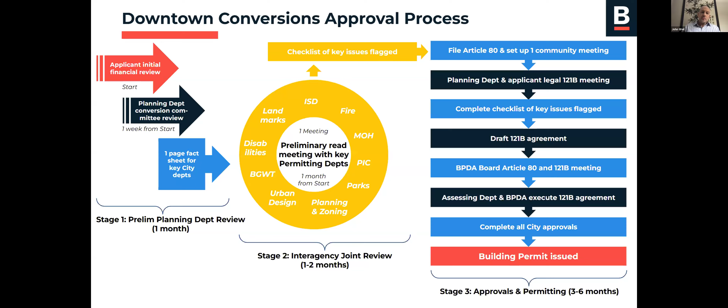Finally, I want to pause for a moment because we're starting to see more complex projects come in, some involving physical extension. I'm imagining that in the coming months there's potential that projects will come before BCDC where there's physical extension and we're cresting above the 100,000 square foot range. This may become something where I find myself in front of you introducing a project with the proponent and getting your feedback, which would be a very exciting development if we're able to hit that level of scale.

I want to say these aren't easy to get done and they're by no means a slam dunk, but I think they really are a win-win for the city of Boston. I appreciate your time this evening being able to introduce the program, and look forward to your support in the future as we bring projects in front of you. I want to pause now and open it up for questions, in case that was a lot of information, but hopefully you found it useful.

John, I don't necessarily have a question. I think this was an excellent presentation and a really admirable process you're going through. I really like the ambition of more living in downtown and bringing that vitality to the core of the city. I think the next follow-up planning challenge might be ensuring it's a livable city where people have access to services, grocery stores, cleaners. I'm sure you don't want people living in the core only to have cars and use them to go do all the basic necessities of life. So I think that's the next thing for the city to start planning - how do we make this a walkable city with all the services these residents will need? But otherwise, I think it's a really great program.